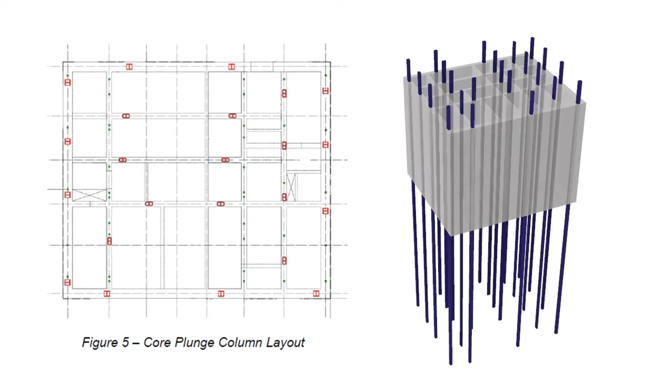Last week, we talked about the core. The core was constructed above the plunge column because of top-down construction, and the core construction method was slipform. It is faster than conventional formwork, so constructors could reduce the construction period.

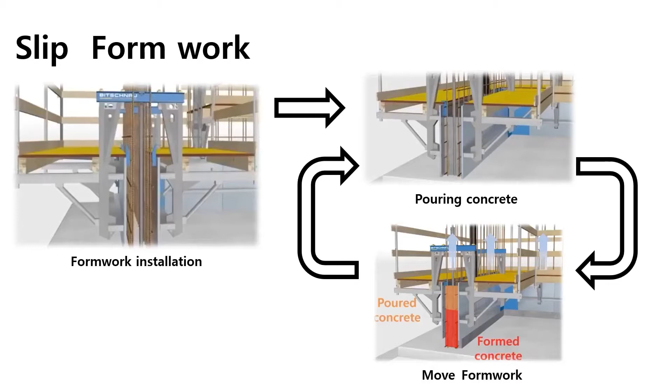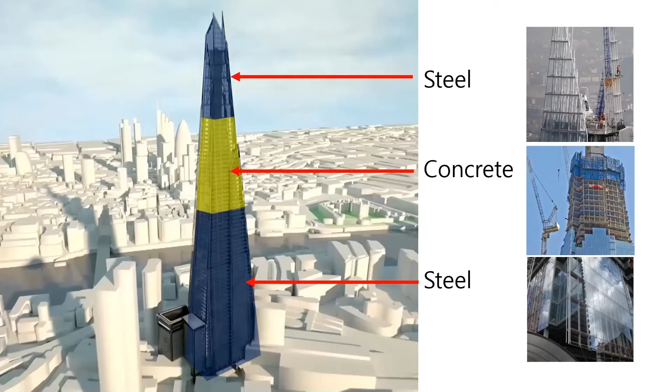Today, we will talk about the structural characteristics of the shard. The shard has an unusual characteristic: the building structure is a hybrid superstructure. As the number of floors increases, the materials that make up the floors change twice. But a hybrid superstructure is very hard for structural analysis and construction. This is a finite element 3D model of the shard. It is very complicated to analyze the structure and construct the real building.

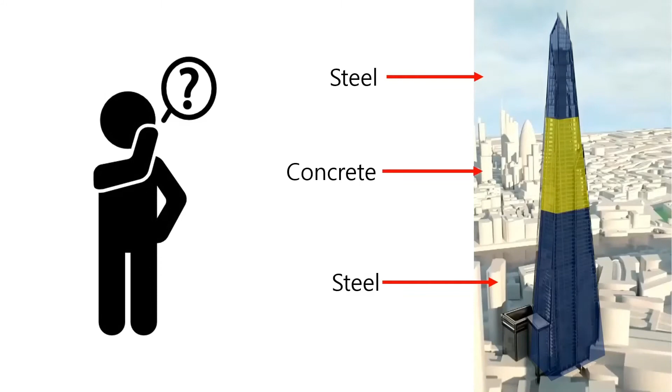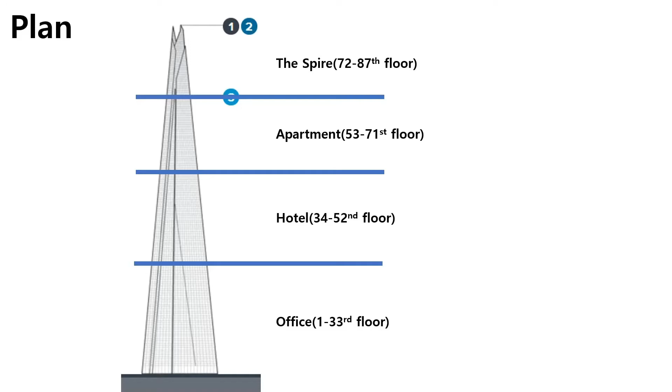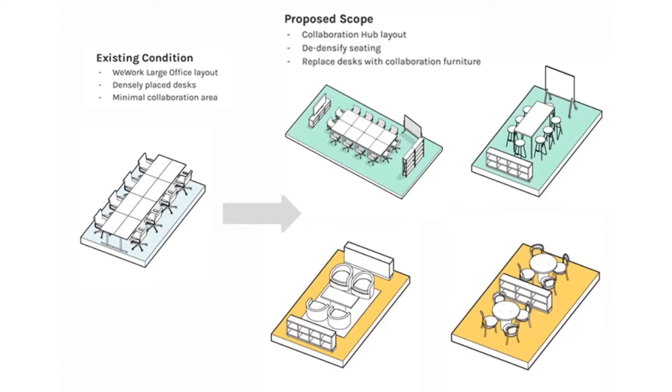Then, why did the structure of the shard have to be hybrid? Because the shard is designed as a complex building, each floor had to be constructed as an optimized space for its usage. Let me explain the office floor first. There will be various arrangements for each company's purpose, so a variable and large open space is better for the office floor than a fixed space. So the office is located at the lowest and largest part of the shard, and to make a large open space, designers had to reduce obstacles like columns.

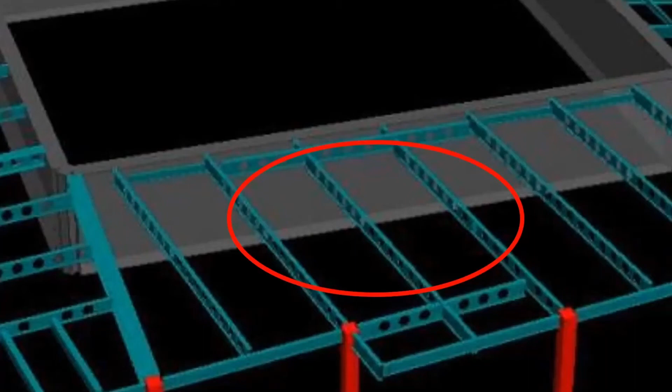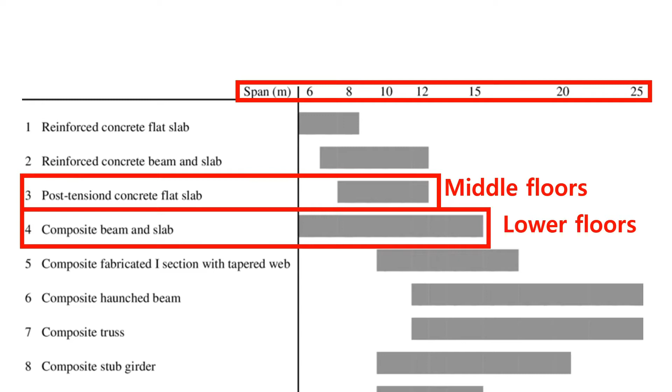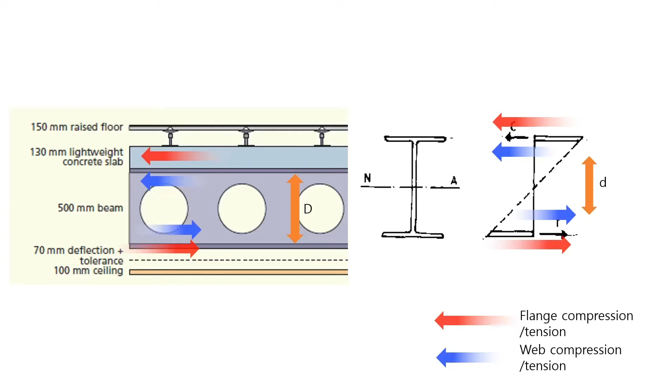This is the structure of the composite beam floor. There are very few columns inside the area, so a large open space could be made. I'll explain the shape of the beam which made space without columns. To make a long span beam, composite beam and slab was the best choice, so steel-concrete composite beam was used. The web is very long, 500 mm, so the second moment of inertia is big. The beam is a composite beam; in the compression area, concrete takes stress together, so compression strength becomes bigger. Therefore, a 15-meter long beam without columns could be made.

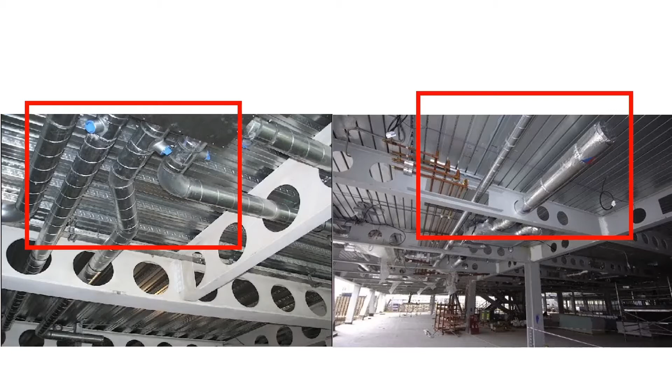And the office needs air conditioning, ducts, piping, and cables. Circular holes in the beam made it possible to make the ceiling very thin, so the height of each floor could be reduced. Next, hotel and apartment.

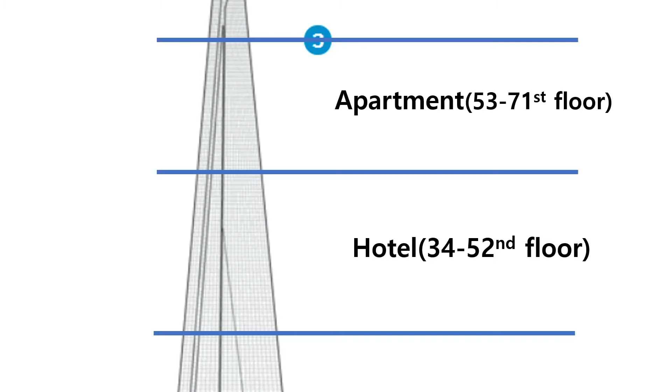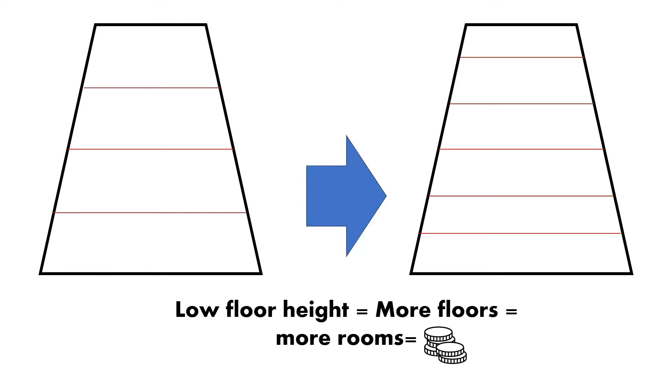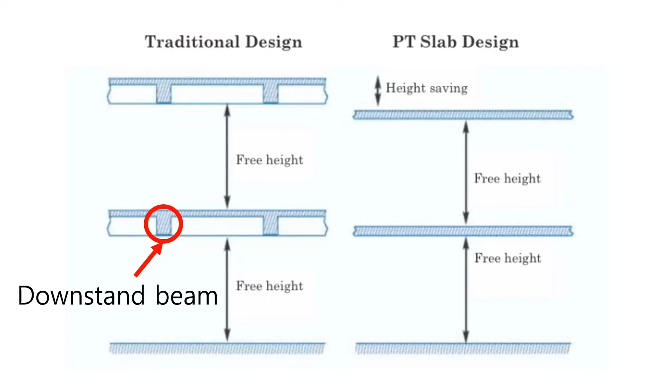Hotel and apartment parts used post-tensioned concrete. There are many reasons the middle part of the Shard used concrete. First, because of 9/11, skyscrapers are required to improve fire resistance, and most skyscrapers didn't use steel structure. And for the profitability of the hotel and apartment, designers had to put many floors in the limited height, so they wanted to reduce the thickness of each floor slab. By using post-tensioned concrete slab, the downstand beam could be removed, so thickness of slab was reduced. Conclusionally, by using post-tensioned slab, extra two floors could be added.

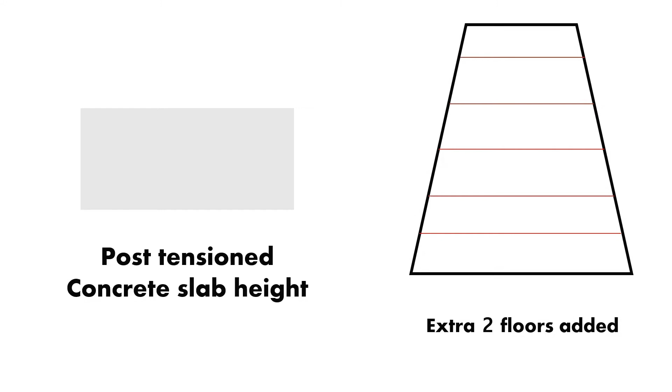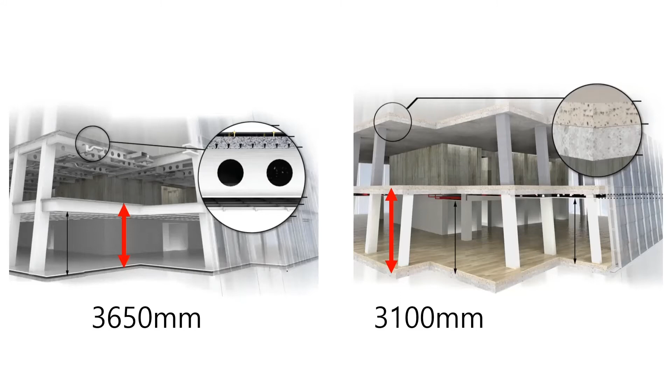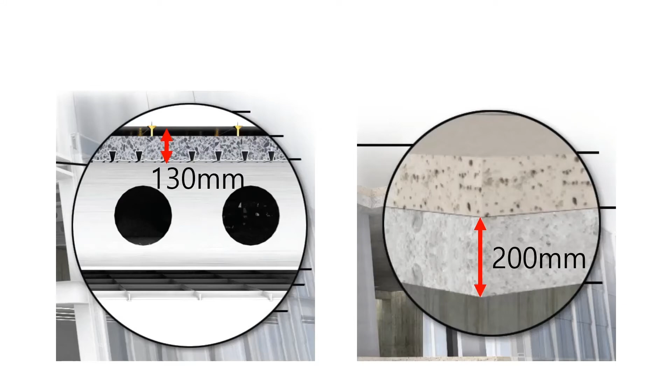This is a section view of the concrete floors. Compared to the composite beam floor, the post-tensioned concrete floor reduced floor height by 550 mm. Also, the concrete slab is thicker, so the sound insulation performance, which is very important for an apartment, is better. And as we talked about previously, the concrete part provided damping to minimize lateral acceleration and thus reduces the swing of the building by wind.

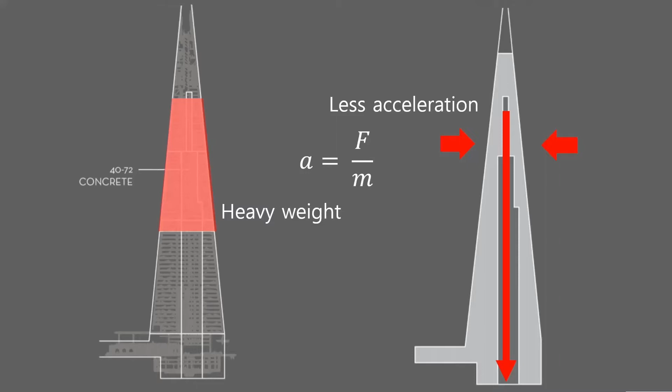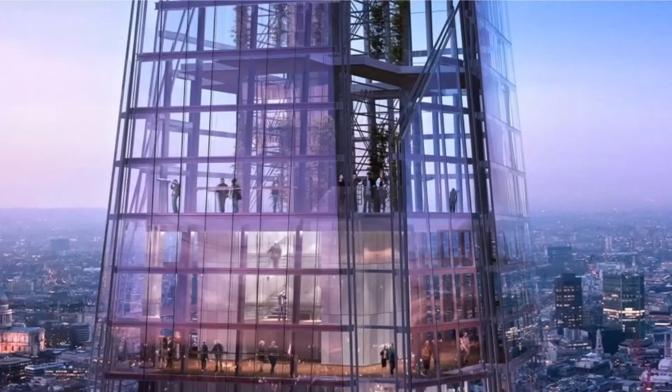Next, spire. The high-rise part of the shard was not a good environment for apartments because of small area, so the designers made the spire an observatory and radiator. As radiator, it acts as heat rejection for the building. We'll talk about that in the building efficiency presentation. There are floor plates every third level of the spire, and a central mast provides stability.

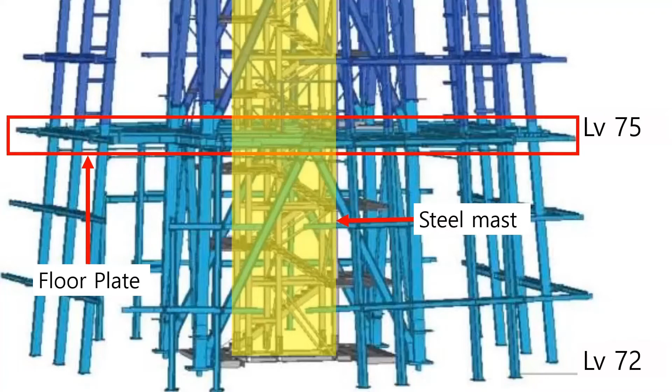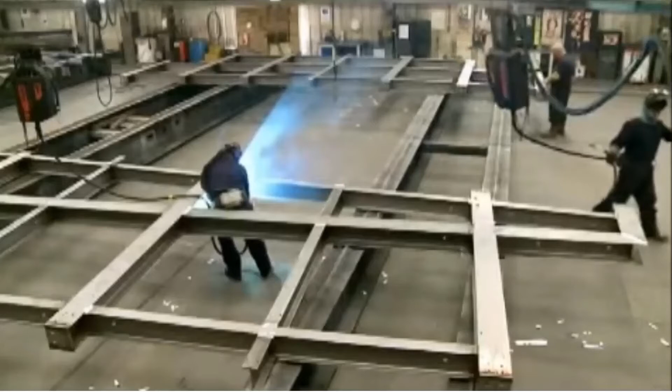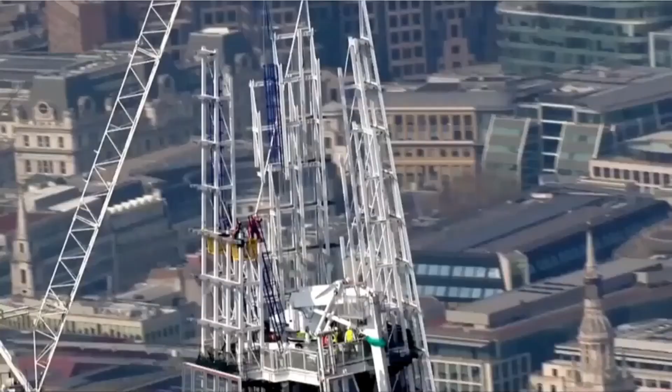There was a big problem in spire construction. The area of the construction site was too small and too high, so constructing the steel frame at the site was impossible. So engineers decided to make the module on the ground and raise it up by crane. Construction of the spire was a very challenging and hard process; we'll talk about it in the construction presentation.

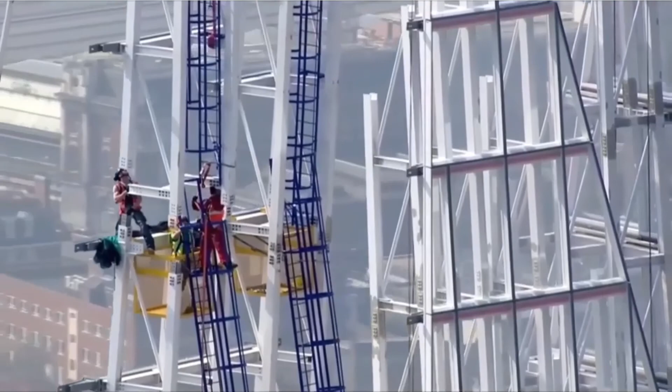There were many problems to construct the spire. At this height, lateral load such as wind load must be considered, because wind pressure gets stronger as height goes up. Actually, in strong wind, the shard is intended to move up to 50 cm. The shape of the shard is good in terms of wind pressure strength: the higher the building goes, the smaller the side area becomes, and force is a multiplication of pressure and area, so lateral load isn't getting much bigger.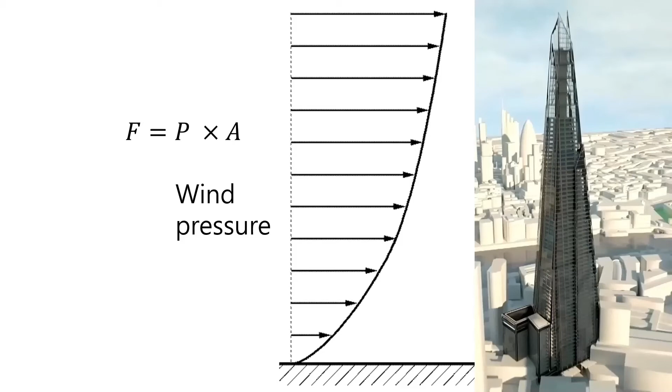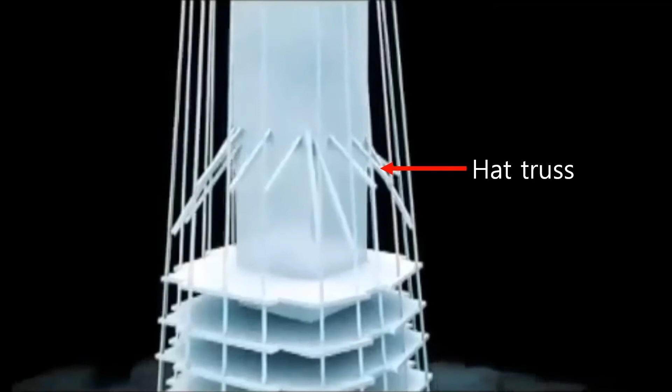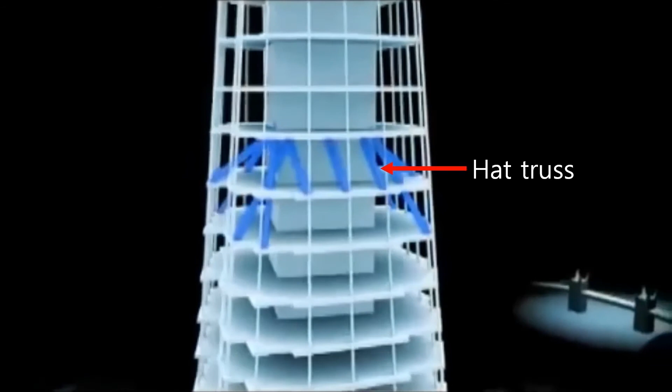To take lateral load, engineers designed a hat truss at level 66 to 67. The hat truss distributes lateral load applied to the core to the perimeter columns, reinforcing the lateral strength of the building. It is like a ski pole: when you are skiing, something pushes you laterally; your arm is the hat truss and the perimeter column is the ski pole.

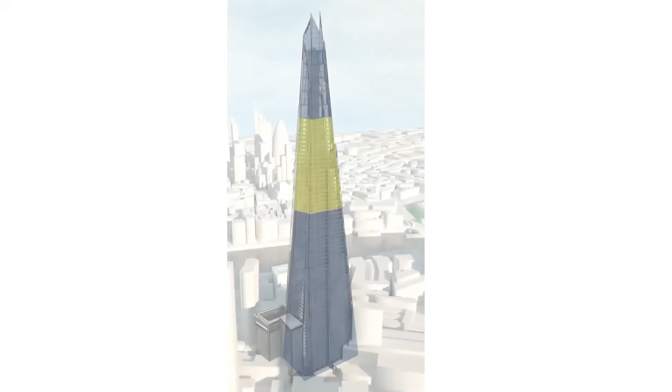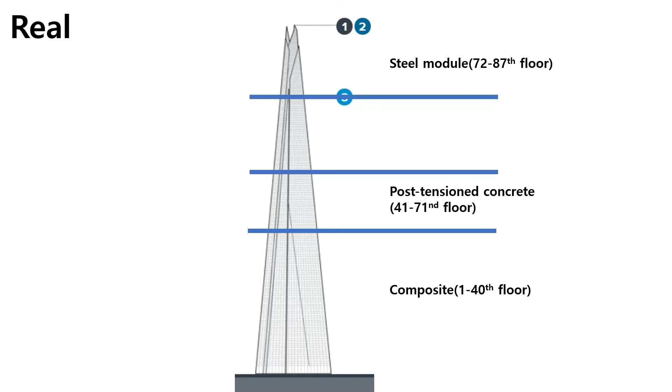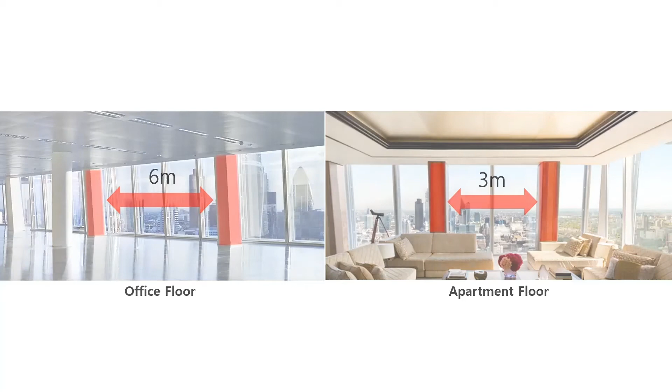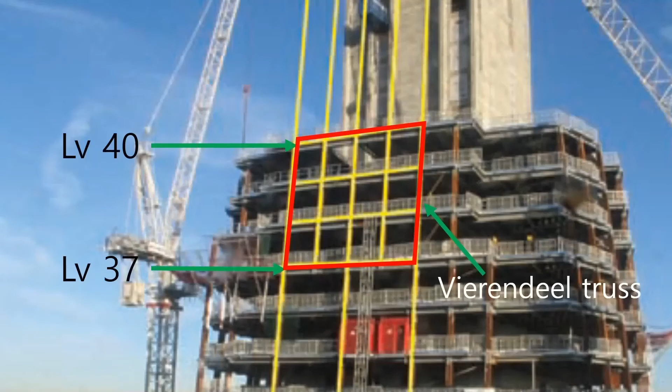Finally, I will talk about the method to connect different materials. To match the plan to use, post-tensioned concrete should start at level 34, but in reality, concrete starts at level 41. This is because the perimeter column span of the concrete floor and steel floor are different. To make a concrete slab without a downstand beam, the limit of perimeter column span was 3 meters. Engineers found the solution to connect these two different columns: at level 37 to 40, the top of the steel levels, a Vierendeel truss changes the span of the perimeter column from 6 meters to 3 meters.

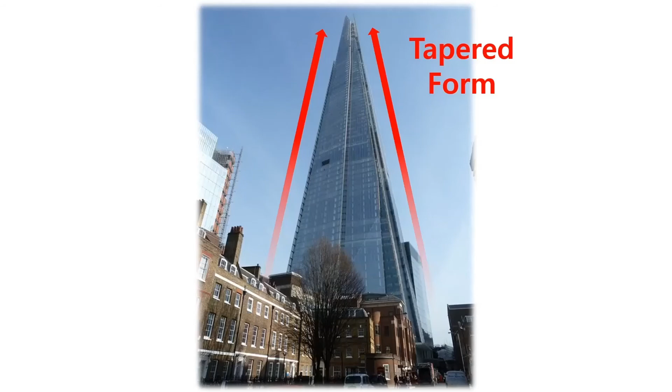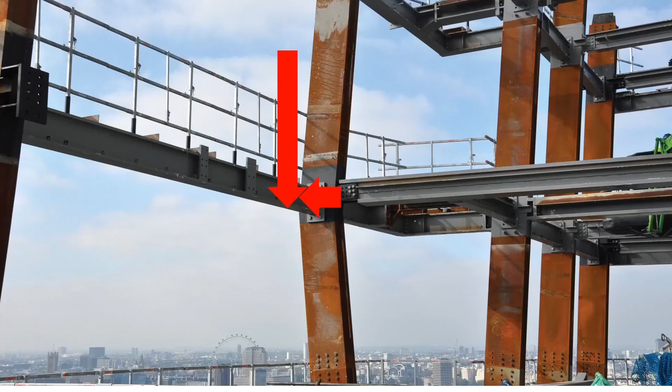And the area of the floors becomes smaller as the building goes up. It appears to have a smooth taper form, but look closely, it is not. The slant perimeter column transfers to a vertical column by a load sharing system. There are even column setbacks: the inclined perimeter columns step back toward the core because of a limit of ground level. Therefore, changes of direction generate substantial horizontal push and pull forces, and these forces are taken back to the core by diagonal steel floor framing.

This time, we talked about the structural characteristics of the shard. Next week, we will introduce the construction method of the shard.